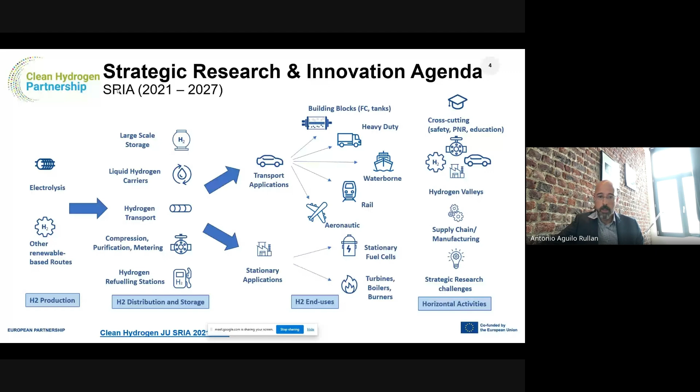So how do we work? We have the framework throughout this multi-annual financial framework, and then we have annual work programs, which are accompanied by annual calls for proposals. So we have launched now since 2022 four calls for proposals. The last one closed in April this year. We have received an unprecedented number of proposals, 212 proposals submitted to us. We will proceed with evaluations before the summertime. And then we are already working in the preparation of the next call for 2026, which is expected to be published in January 2026.

The way our work programs are drafted, as I said before, our governance is made up of the European Commission and the industry and the research communities. So basically there is a co-creation between those actors, which is then managed by the joint undertaking. We are now starting to prepare call 2026, and the process will end towards the end of this year. And as I said, the publication of the next call will be in 2026. In terms of the rules, we are bound as well by the general annexes of Horizon Europe. We have some specific conditions, but the way topics are drafted and structured is very much aligned with other topics in Horizon Europe, so there is no difference in that regard.

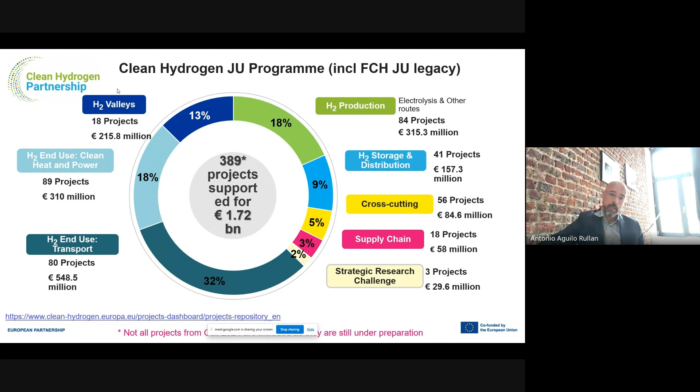And now we are covering to the same extent all the other elements of the value chain, especially on storage and distribution, which is something we didn't do so intensively in the past. So that's a bit for the projects.

And just the very last slide, I was mentioning before that as the technology matured, back in 2014, we had one of the first integrated hydrogen ecosystems. We called them hydrogen territories in time. That's the BIG HIT project. And that set the basis of what we refer to now as hydrogen valleys, which are, as I mentioned, integrated hydrogen ecosystems limited to a given geography in which we are generating green hydrogen with renewables. Then this is distributed, stored as necessary, and used by different applications.

So now we have 21 of these projects. We are supporting them with funding of around 250 million euros. And of course, in the Horizon Europe program, we have very limited funding. So on average we are funding these projects with 20% of investments. This is why it's no surprise that the total cost is around 1.3 billion euros. So basically, these projects are really a catalyzer to develop these ecosystems across Europe. And the rest is coming mainly from other sources of public funding, national, regional funding, but also from private investments.

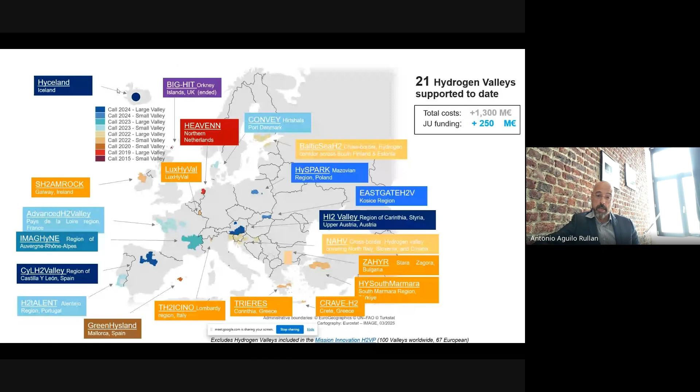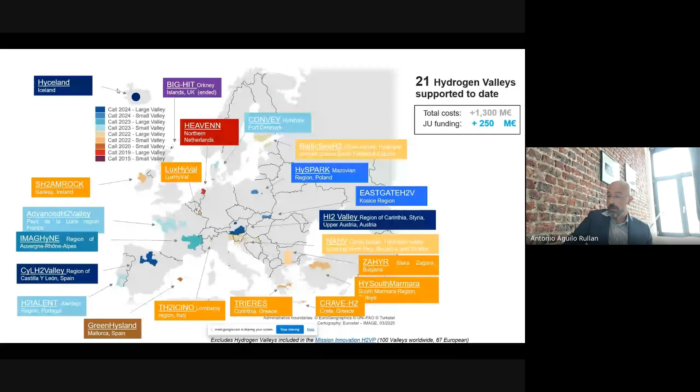We have more details on these projects on our website, but I think what is interesting to see here without going into the details is how spread the support is, covering all areas of Europe. And just to end, looking at the future, of course, we are now moving into the next framework program. There is nothing yet certain. We hope that we will continue with the joint undertaking in the next multi-financial framework, but this is, of course, something that cannot be taken for granted.

And just to add that while we are the main R&I instrument of the European Union to support hydrogen projects, hydrogen is supported also by other programs. This is something which I mentioned at the very beginning. It's reflected in the agenda today with projects from different programs. But we are, again, very happy to participate in this type of event because they probably target a different community than what we are used to. And I think at this point in time synergies among different programs, stakeholders and governance levels are important. We are very pleased to be able to let you know who we are and what we do. And if you have any questions, feel free to get in touch with us.

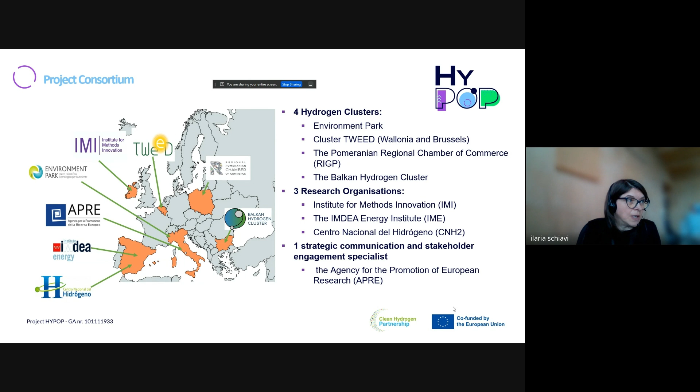A quick slide to tell you how we interpreted public awareness. We thought that it wasn't just the citizens that we had to work with, but from bitter experience, which I'm sure some of you have already had as well, we thought that we needed also to try and bust some of the myths with the public institutions, so first responders, permitting, certification bodies, and decision makers. So for this reason, the project has had two parallel areas of work, which will both result in some tools which we hope will be useful to raise the awareness both in the citizens and in the public institutions. And we have reached some interesting results so far.

So how we proceeded in this project: first of all, we wanted to analyze the status quo, so the public understanding, the institutional requirements, and we gathered data from surveys, from social media, from mass media, for the public engagement aspects, and of course on the local regulations. Then we proceeded with some co-creation workshops to try and speak directly with the citizens and the stakeholders, and it hasn't been easy, especially for the stakeholders.

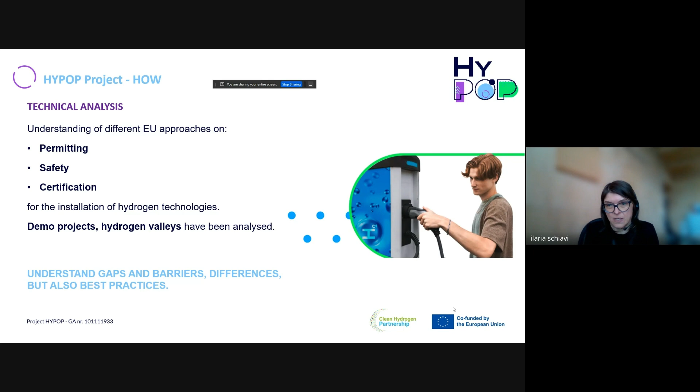As for the technical analysis, we started looking at the different approaches on safety and in general permitting and certification of hydrogen technologies. We analyzed different demonstration projects. We also analyzed the hydrogen valleys to understand how they are addressing these aspects, and we found a few differences amongst the countries. And again, this was really good to understand what the barriers are, where there are perhaps some gaps in regulations, because the regulations haven't quite caught up with what's happening, and then also the best practices from the so-called front-runner countries that are already working on this.

So, as I mentioned initially, we had the brief to cover particularly the EU 13 countries. Of course, we covered the so-called HYPOP countries because they are the ones that we know better, and we can interact directly with our public authorities in the local language, which is an important factor for the interaction with these authorities. But also we looked at the so-called front-runner countries, which are those countries where hydrogen technologies have been implemented the longest, and therefore there is more knowledge about these technologies.

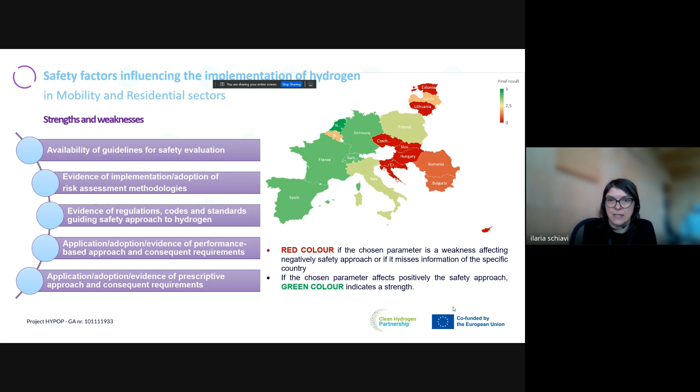The second phase of the project was about the co-creation workshops. So we went out and we spoke to both the citizens and the institutional stakeholders. And the latter weren't so easy to engage. Again, country-specific differences could be found depending on the different ways that, for example, safety or permitting is carried out.

But we did engage the citizens and the stakeholders in the local language, undertaking events, large international conferences, undertaking events specifically on these aspects, and we are now collecting all the different information from the different countries, and we will be using these for putting together the guidelines based also on the findings of the technical analysis.

So for what concerns the public engagement strategies, we will come out with a guideline, which is, again, to be used by those people who are implementing hydrogen installations and need to speak to the public, and also by the communication officers who perhaps need to speak to the public.

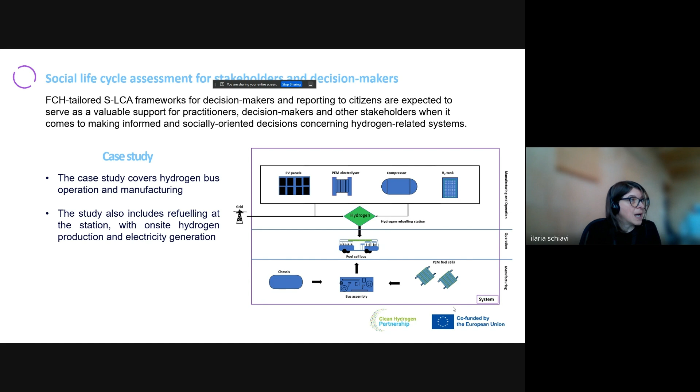Of course, social life cycle assessment is a tool that we are getting more and more used to, and it needs to grow also as a tool. But we contributed to that as well. And finally, the social life cycle indicators are one of the outcomes of the project, but as I mentioned, these are all guidelines that we will be publishing by the end of the project in September, and you will find them on our project website, really there to be used for making sure that we grow as a continent in introducing hydrogen technologies in a safe way, in respect of the permitting requirements, certification requirements, and also with a clear communication strategy with the public.

What's next? So in these last few months, we will undertake a mutual learning workshop in September to share with other projects HIPPOP achievements and transfer our knowledge and tools to the different projects. So watch out for this. And also we will finalize our HIPPOP toolkit, which, as I mentioned, wants to collect some informative material which would support the awareness raising of both public and citizens. So again, refer back to our website, and if you have as a project some interesting video material that you would like to share, please get in touch, because we would like to keep enriching this tool.

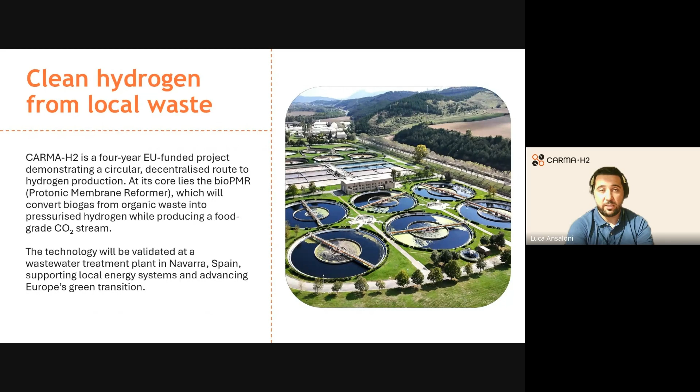And at the core of the project, there is a technology which is called protonic membrane reformer, and I will give you more information about it in the next slides, which will basically convert the biogas from organic waste into pressurized hydrogen. And also, it will be able to split hydrogen from CO2, producing also a food-grade CO2 stream. And the technology will be validated in a wastewater treatment plant in Navarra, Spain, which will help the green transition of Spain, but also of Europe in general.

A bit of information about the key figures in our consortium. So the full name of the project is called Carbon Negative Pressurized Hydrogen Production from waste using an energy efficient protonic membrane reformer. It is coordinated by AIN, which is the Association of Industry Navarra, which is a local industry association in the Navarra region.

But we are in total 12 partners from 5 different countries. You can see here, let me see if I'm able to use the pointer. Yes, we have several technology providers like CoorsTek Membrane Science that is developing the protonic membrane reformer, but also Pentair with 2 different subsections, which are technology providers.

We have end users like ERA, Shell, and SNAM. We have local communities that are those owning the plant and also operating, like Mancomunidad and NILSA. And finally, we have research institutes like CSIC in Spain and SINTEF in Norway. We have a total budget of about 10 million, which comes from the EU, let's say, which covers about 70% of the total budget required to perform the demonstration.

As I was saying, at the core of the project, there is a technology called protonic membrane reformer, or in short, bio-PMR, which has been developed by CoorsTek Membrane Science. And the very interesting aspect of this technology is its process intensification potential. Because as you see here, through this technology, we are able to combine the 6 different steps of traditional steam methane reforming, which is, I would say, the most established method to convert natural gas into hydrogen and CO2, and we can combine them in one single step.

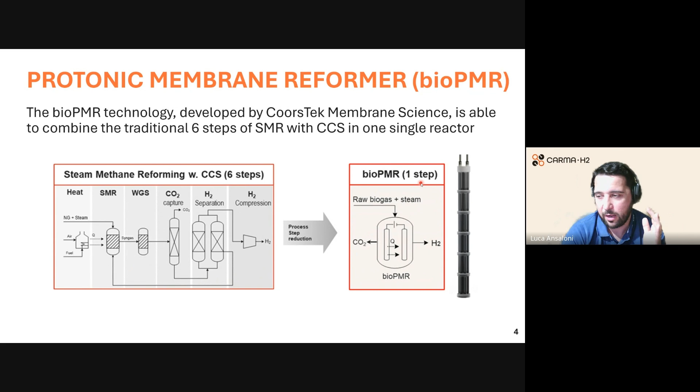And these 6 different steps are basically the heat that you need to provide to the natural gas stream to enter the steam methane reforming reactor. And then you have a water gas shift reaction that drives, let's say, the products towards hydrogen and CO2, but subsequently you also have to split CO2, separate hydrogen and purify it, and then finally compress it. All these 6 steps can actually be performed inside the bio-PMR.

The bio-PMR reactor is a membrane reactor where inside we have protonic ceramic membranes. And these are typically operated at relatively high temperature, between 400 and 800 degrees C. And under these conditions, they are able to break hydrogen into subatomic particles, which means protons and electrons, and then are able to drive, let's say, protons across a dense ceramic electrolyte. And in here, you can see actually the structure of these membranes.

So the BZCY is the ceramic electrolyte. And then the membrane is composed of 2 other layers. You have a nickel BZCY on the top and then also on the bottom. And these 2 layers are also the electrodes of the system. And at the same time, the presence of the nickel allows also for the catalytic reaction of CO2, methane, and water towards CO and hydrogen, which is then driven also with the water gas shift towards hydrogen and CO2.

So basically, as you can see from this representation here, what you do is that you send methane and water inside the inlet of the membrane, and then because of the catalytic reaction of nickel, methane starts to react and you form hydrogen and CO2. But then at the same time, by circulating electricity through the membrane, you're able to extract the protons that are then recombined in molecular hydrogen on the other side of the membrane. And what you end up with is basically compressed hydrogen, and CO2 plus water on the other side.

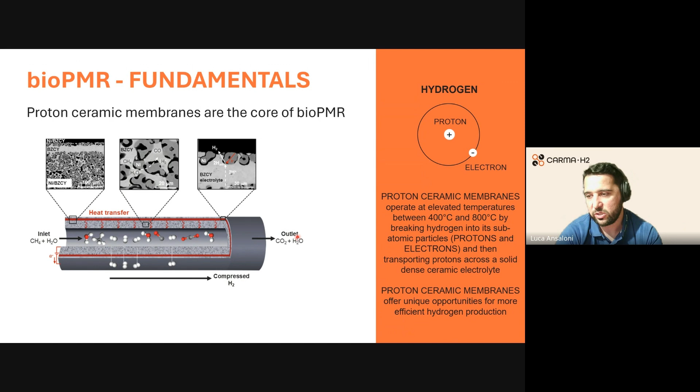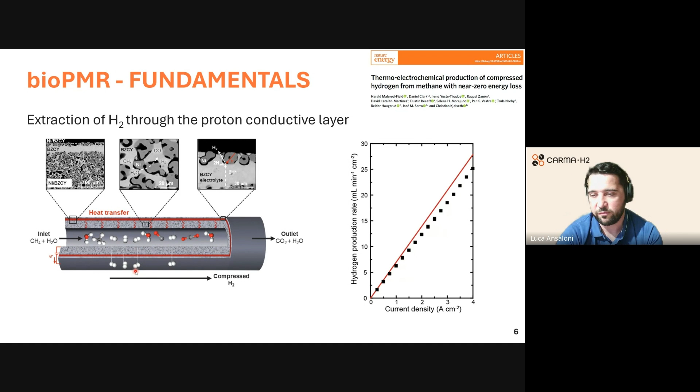And by, let's say, increasing the current density, you are able to tune the production rate of hydrogen. So you are able to tune how much hydrogen you actually pull on the other side of the membrane. And this is interesting because by doing so, you actually have the feature of a traditional membrane reactor. In particular, you are able, as you can see here, to convert methane almost entirely. We have conversion degrees up to basically 100%. And at the same time, you're also able to drive the water gas shift reaction basically towards the products, so towards CO2, suppressing almost entirely the CO yield.

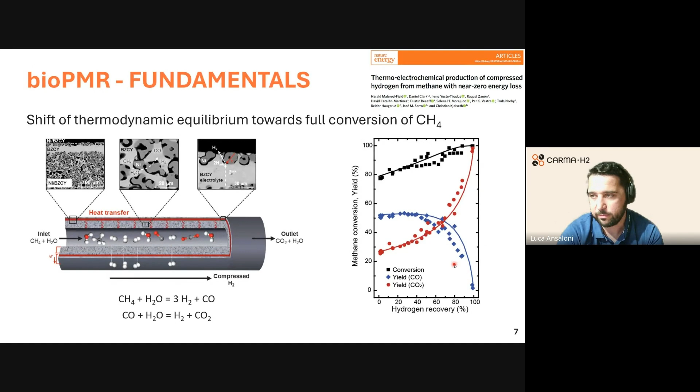At the same time, this system is also quite interesting because it is a near zero energy loss system, meaning that by combining all these 6 different steps that we talked about in the beginning in one single reactor, you're able to counterbalance the extremely endothermic steam methane reforming reaction, which is represented here, by basically providing heat through the exothermic reactions: the water gas shift, the separation, which is electrically driven, and also the compression, which is also electrically driven, and therefore generating heat at the same time.

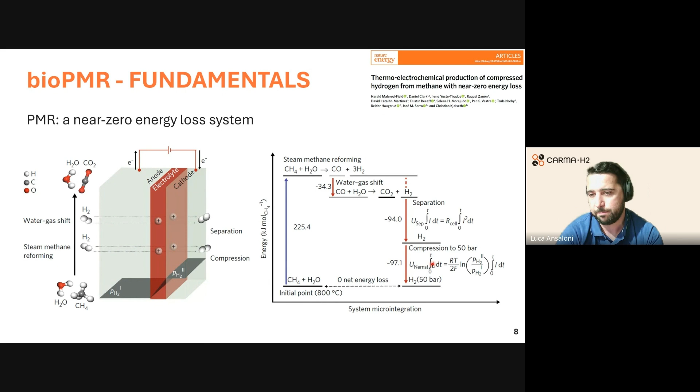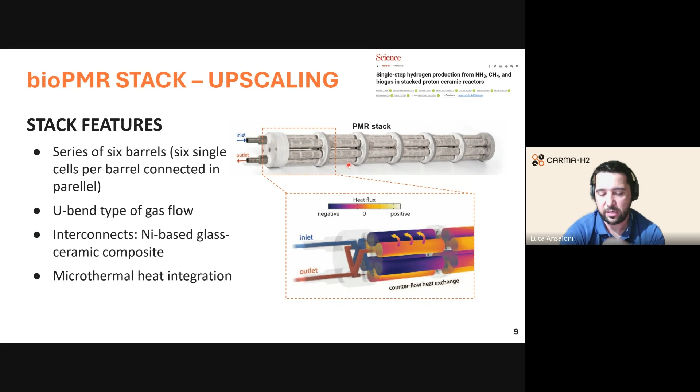Partners like membrane science try to also exploit this feature and develop a reactor which is called a U-bend type gas flow. And by doing so, they are able to basically recover, as you can see here, the heat exactly where you need it. So basically at the outlet, where you will have the highest amount of heat because of the extraction and separation of hydrogen, you put it in contact with the first part of the reactor, where the endothermic steam methane reforming reaction is happening. And through this thermal integration, you are basically able to run this system without the need of additional

And we have also demonstrated already in the lab that it's possible to use a biogas stream. For us, a biogas stream was a stream composed of CO2 and methane, meaning that in addition to the 6 steps that I showed you before, we can also avoid the CO2 removal step that you need in a biogas process to enter the traditional steam methane reforming reactor.

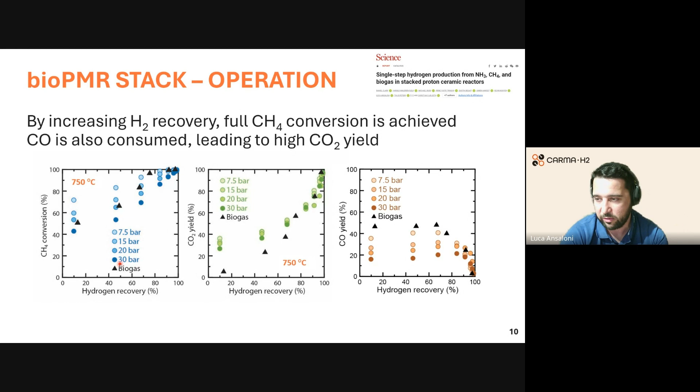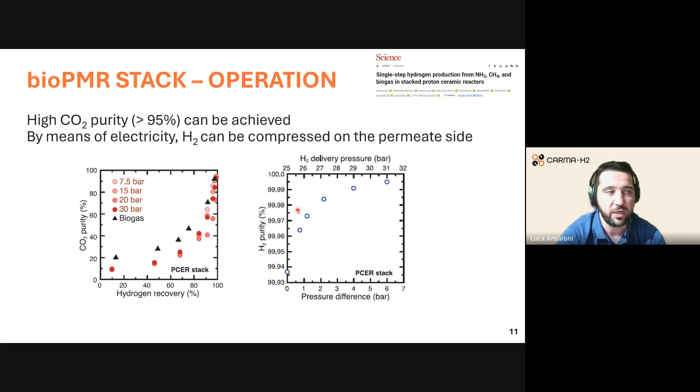We can also achieve pretty high purity on the permeate side and on the retentate side of the system, meaning that this CO2 can be already ready for liquefaction, as you will see later. And at the same time, the system, through the electrochemical compression, can also be operated so that the permeate side is at higher pressure compared to the feed side, which is a feature that is very peculiar for this type of electrochemical system and cannot be achieved with traditional membrane reactors that are based on physical separation.

And then finally, to conclude a little bit about the demonstration test that we will have in Spain. In particular, the BioPMR technology will be demonstrated at the Arazuri wastewater treatment plant in Navarra, as I said in the beginning. The plan is to run the BioPMR unit for at least 4,000 hours, producing about 500 kilos of hydrogen per day, that will then be used for energy and mobility applications. At the same time, we will also generate about 4 tons of food-grade CO2 daily that will be ready for use. So we plan on utilizing this CO2 for CCUS applications.

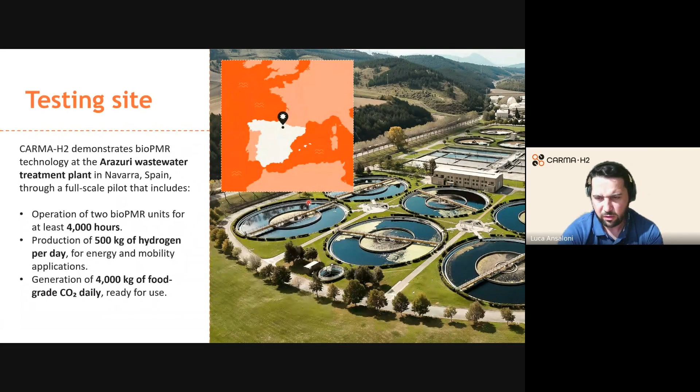And this is just a very simple scheme of how the system will be operated at the plant. We will take the biogas coming from the anaerobic digester, and then we will have first biogas pretreatment. In this case, it's mainly going to be about desulfurization, because we have to understand what type of sulfur content is allowed inside the BioPMR unit that is coming downstream. And then finally, the BioPMR will produce the pressurized hydrogen, while the CO2 stream will be sent to a liquefaction unit that will make liquefied CO2 that can then be taken to utilization applications afterwards.

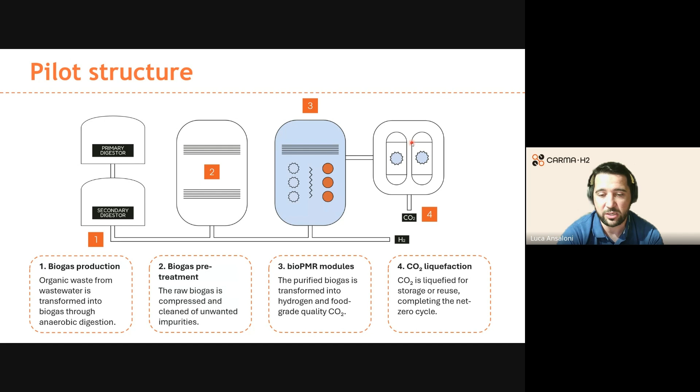Thank you very much, Luca. Next up, we have Hugo from the University of Évora, presenting the H2 Talent Project, developing hydrogen valleys in Portugal.

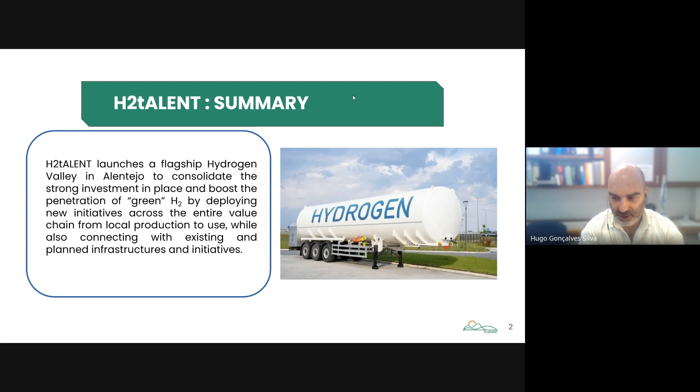So our project is a hydrogen valley. For that reason, it's at a higher TRL, so we are not presenting research in that sense, and in that way it's slightly different from the last presentation. Basically, the idea of H2 Talent is to launch a flagship hydrogen valley in Alentejo, and to consolidate the investments that are already in place in green hydrogen. And we want to develop new initiatives across the entire value chain, meaning that we are going to address production to end users.

Our objective is to produce more than 500 tons per year of green hydrogen, and it will be used by several off-takers in industry, mobility, and building applications. Furthermore, we want to explore the strategic position of Sines Port.

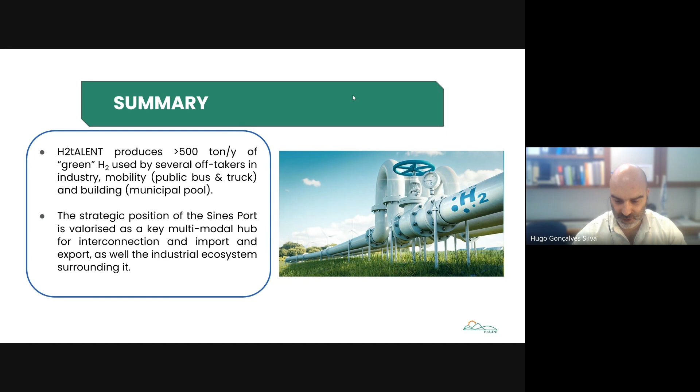It's a port in the south of Portugal that is meant to be valorized as a key multi-modal hub for interconnection and import and export of green hydrogen. So it is being prepared for that possibility.

The project, let me just briefly mention, is composed of 7 work packages, and the fundamental work package in which most of the action will take place is work package 3, industrial application at the Sines backbone, and work package 4, applications in industry, mobility, and buildings across Alentejo.

Right now, we are in the development phase, so I don't have results to present, but I can talk a bit about our demonstrators. So basically, the valley is composed of 4 demonstrators. The most important one is at Sines. It's basically an electrolyzer, small scale, but this is the first phase, 15 megawatts. The complete phase will reach 120 megawatts, but the first phase is meant to be a demonstration phase, and it will produce roughly 500.

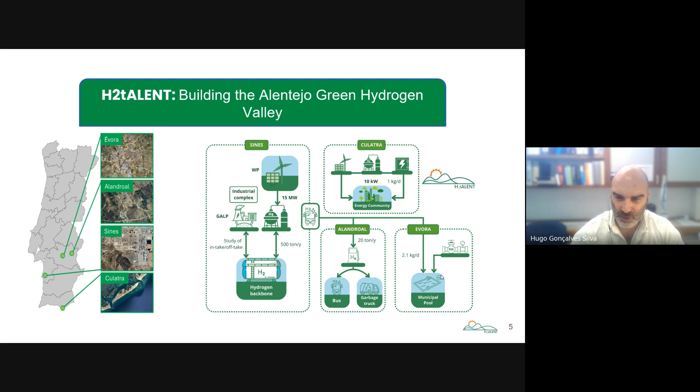In terms of the time frame, it's a 5-year project. We are already in month 15, and we are now in the development phase of the demonstrators, and hopefully in a year's time we will be starting demonstration. So our goal is to have the demonstrator running in 2027.

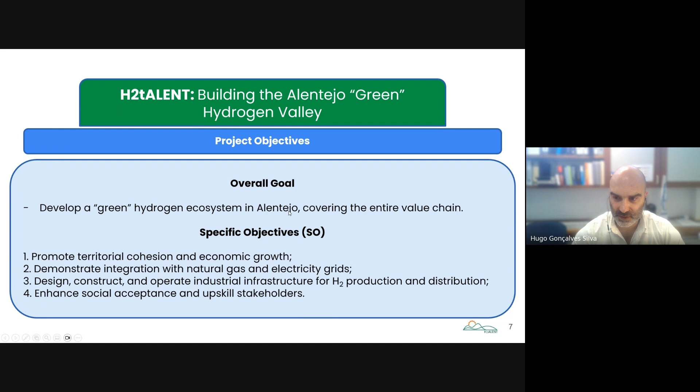Let me just briefly mention that our specific objectives are to promote territorial cohesion and economic growth, demonstrate integration with natural gas and electricity grids, design, construct, and operate industrial infrastructure for H2 production, and enhance social acceptance and upskill stakeholders. These specific goals are under the umbrella of the overall goal, that is the development of the green hydrogen ecosystem in Alentejo, and we are covering the complete value chain.

Furthermore, we should highlight that we also use digital tools and environmental impact assessments. Another very important aspect of this project is that we are promoting replication in 2 other hydrogen valleys, in Germany and the UK. So the idea is that lessons learned from this project might be helpful to follow-up valleys. We are publishing our deliverables in the Zenodo community of H2tALENT, so everyone is free to go and check the information that we are producing.

So basically, as we have introduced, we will be producing 500 tons per year. We are expecting to export green hydrogen from the port of Sines. Import and export is a very important topic, because there are very ambitious targets for hydrogen in Europe, and we should consider in such ambitious plans the necessity to import hydrogen from other countries. In this project, we are considering the Brazil, South America, Latin America market, and the North of Africa market.

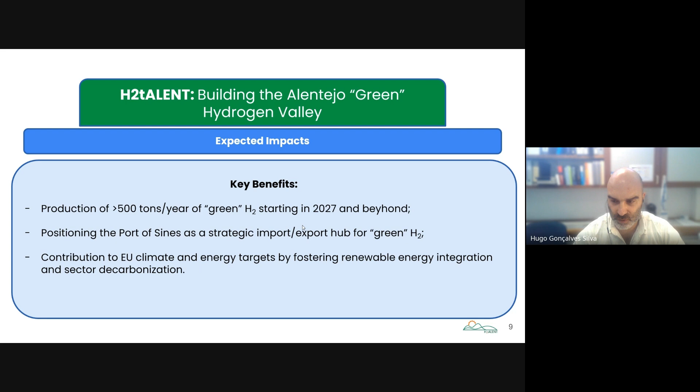So we also contribute to the European Union climate and energy targets by fostering renewable energy integration and sector decarbonization. Our consortium is composed of 29 partners from 7 countries, and we include universities, technology companies, and public stakeholders. We have a strong collaboration with international initiatives, as I have already mentioned, especially Brazil and Morocco.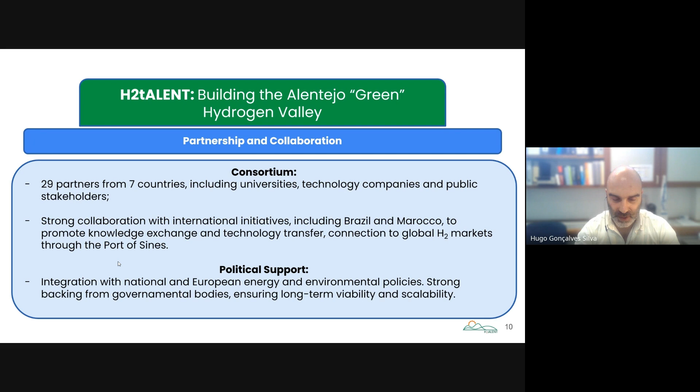In terms of the political support, we have moved towards the political support. So an ambitious project like this has to have public support, and so we are basically in two aspects. We have integrated into the consortium public institutions that are related with key policies, and we are also in contact with the Portuguese government in order to have support on some of the aspects that we want to implement. Please take note that we are sometimes a bit ahead of the legislation that is being rolled out in hydrogen, and so this political support is fundamental.

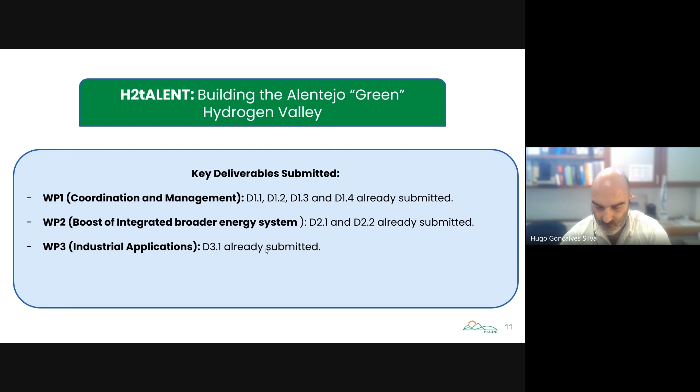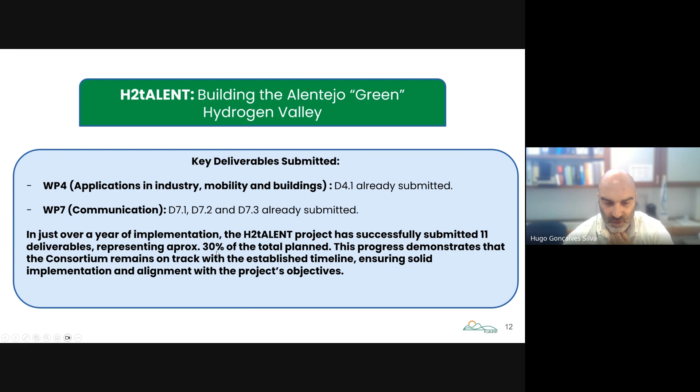Now very briefly, in terms of achievements, we have already submitted many deliverables. As I said, they are published in Zenodo, so if you are willing to know more about H2tALENT, you can go there. And we have submitted approximately 30% of the total planned deliverables. We have reached milestone 1, and in terms of achievements, we also managed to put together a team of 29 partners working together from 7 different countries, which is a very challenging task.

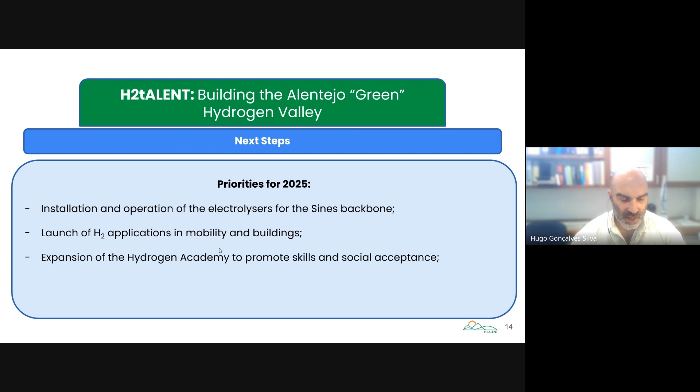Finally, our next steps are the installation and operation of the electrolyzers at the Sines backbone, launching H2 applications in mobility and buildings, and expansion of the Hydrogen Academy to promote skills and social acceptance. So our priority is to implement H2tALENT naturally, and also we want to submit new projects in this field to consolidate the ecosystem that is being created.

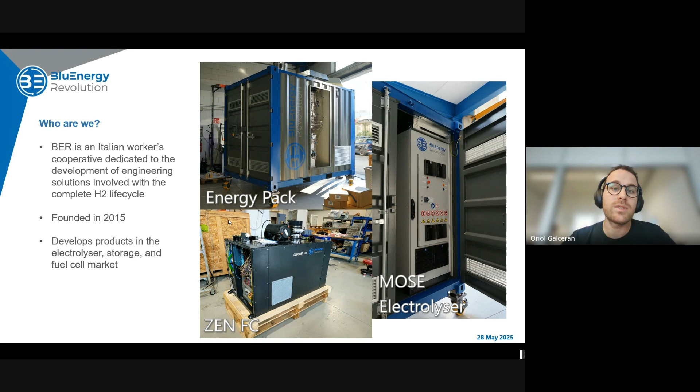So, going specifically into the EVELIXIA project, it's a big project. There's a lot of partners, I think it's about 26 of them, and it's a very broad project. The main objective of it is developing a framework by which smart buildings can communicate with each other and the grid. So more specifically or technically, we're trying to build an API that allows bidirectional communication between the consumers of electricity and the producers in a standard manner, in a way that can facilitate things such as grid planning, monitoring, etc.

There's also a big part of public engagement. So many of our pilot sites deal directly with the population, informing them about energy consumption behaviors, and just trying to bridge the gap between the grid and the consumer. So the project has 7 pilot sites in France, Denmark, Finland, Romania, Spain, Austria, and Greece. And all of them have slightly different approaches towards testing this platform that I was talking about.

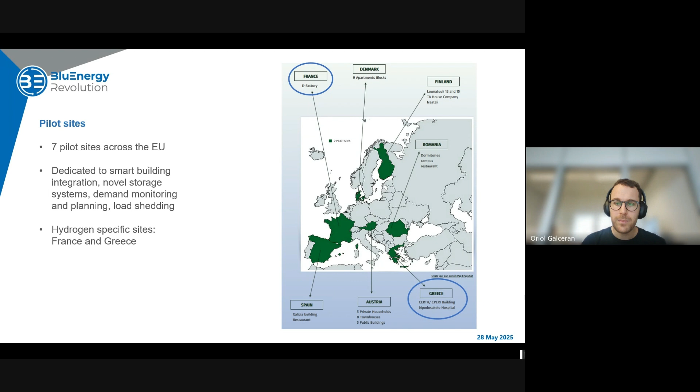So what we're doing in Greece is we are installing our energy pack system. Our system is basically a self-contained energy storage system which uses exclusively hydrogen as an energy vector. This prototype for the pilot site has 3 kilos of metal hydride storage and 10 kilowatts of fuel cell. But we've developed this system, and I think this speaks about the capacity that these projects have to provide innovation in the private sector.

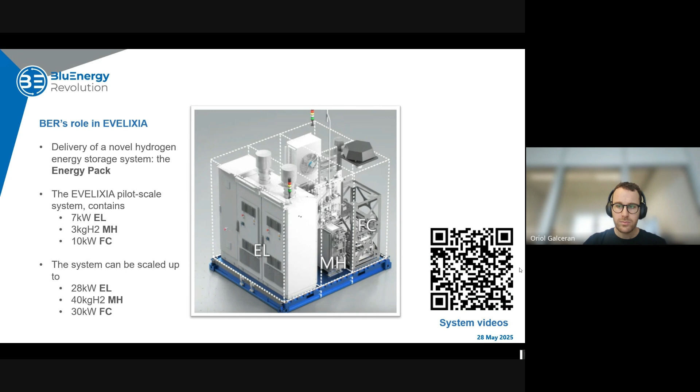Using the development that we've gone ahead with for this system, we've made it so the energy pack can be scaled up into a much more powerful system. So we can go up to 28 kilowatts of electrolyzer, 40 kilograms of hydrogen storage, and 30 kilowatts of fuel cell within the same system. So I think that speaks a lot about the usefulness of these funds. There's a QR code. You can see some videos that talk a bit more in detail about how the system works. It's also in the next slide.

So the system is going to be installed in the CERTH Research Center in Ptolemaida in Macedonia. Not North Macedonia, Macedonia, the Greek province. The building currently has 20 kilowatts of photovoltaics and a battery system. And what we're going to do there is directly connect the energy pack to the existing system. So in the scenario, for example, that the photovoltaic is higher than the load and the batteries are full, that energy would otherwise be given back to the grid.

What we're going to do in this case is turn on the electrolyzer, absorb the excess energy, store it in the metal hydrides, and then when it's needed back, so when the load is higher than the photovoltaic and the batteries are empty, we're going to reconvert that hydrogen into electricity via the fuel cell.

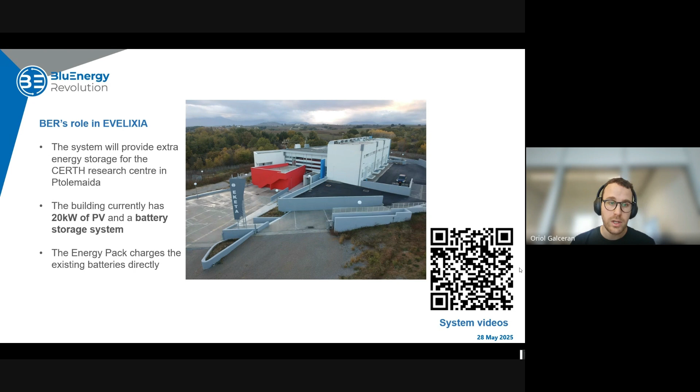So in terms of dissemination activities for this project, we've brought the energy pack to 2 fairs, the Hannover Messe in Germany, and just last week, the Piacenza Hydrogen Expo. We found a lot of interest, because we've been a company since 2015, and we've worked exclusively in the hydrogen market, but we always provided things where the user had to interact directly with hydrogen.

This is the first time that we provide a product where the hydrogen is completely contained within the product and the user doesn't have to interact with the hydrogen. Sometimes they're a bit scared to deal with it because it's not known how to deal with it on a larger scale. So we found a lot of interest for this since the user has to deal with electricity only, which is much more common knowledge. So we're very happy with the development that has been facilitated by this project and the interest of the public in it.

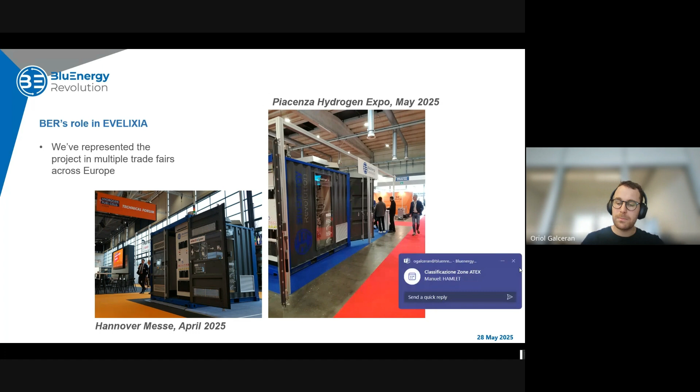So the next steps for the project are, as you can see here, the delivery of the system. The system is currently on its way to Greece. It's on the truck and it's going there. And late June, we are probably going to travel there to get the commissioning up and running. We are the first pilot site to be doing the commissioning, so we're very happy about that.

And the platform that I talked about will start to be tested at the end of this year and next year. And the final objective is that our energy pack will be completely controlled by the system and respond to the demands of the building, but also of the grid.

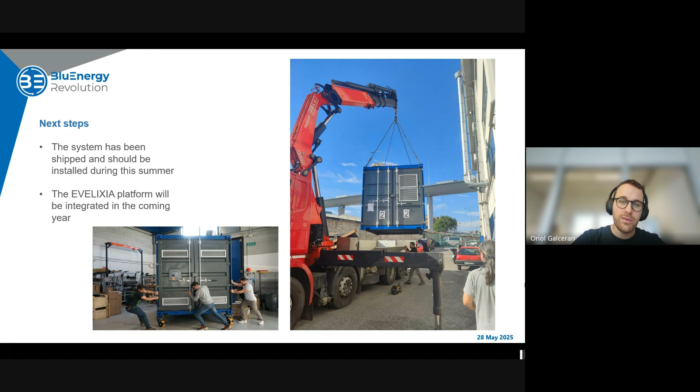Thank you, Oriol. I'm sitting here giggling because that picture of the 3 men pushing the electrolyzer is very funny. Yeah, I wanted to show off our strong guys in the workshop. All right. Thank you very much, Oriol.

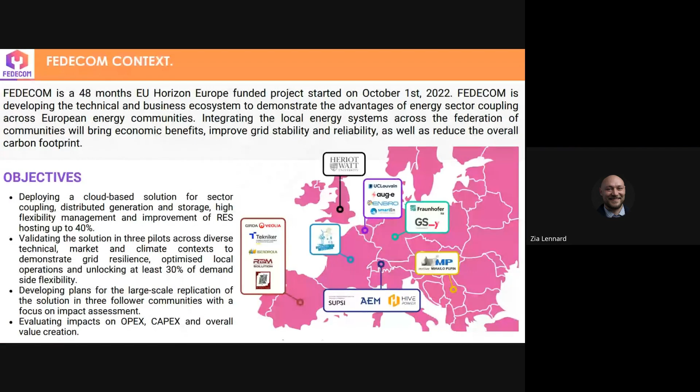across European communities. Sorry, Carlos, we're still on your title slide. Sorry? We're still on your title slide. Yes, I move. I don't know why. Okay, now it's moving? It's not. I'll try to share again. Okay. Sorry. I'll try to do that again. Now? Now we see your title slide. Now you see the second one? Yes, now it's good. Perfect. Finally. Thank you so much, Zia.

As I was mentioning, FEDECOM is a 48-month European Union Horizon Europe funded project, and we started in October 2022. In FEDECOM we are 17 partners from 7 different European countries, and the main objectives are developing a cloud-based solution for sector coupling, distributed generation and storage with high flexibility and improvement of the renewables.

The second one is validating the solution in 3 pilots. I will explain a little more about the 3 pilots, and at the end I will focus more on the hydrogen pilots, in order to check the diverse technical, market and climate contexts. The next objective is developing plans for the large-scale replication of the solution in the follower communities. The last one is evaluating impacts on OPEX, CAPEX, and overall value creation.

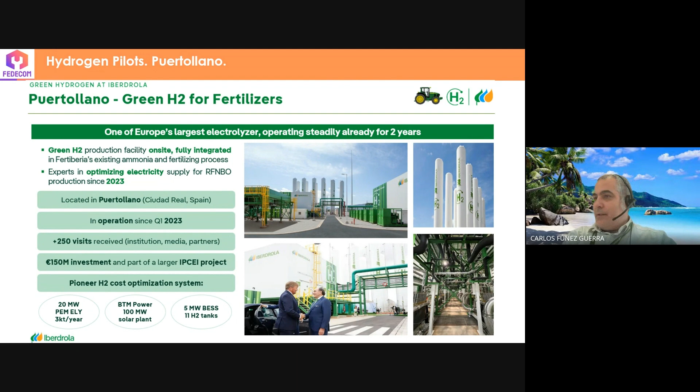Going a little deeper into this project, you can see here more details of the facility. This is the electrolyzer building. We have 20 megawatts, with 16 stacks of 1.25 megawatts each, but with a common balance of stack and a common balance of plant. You can also see the letter E. This is a skid. This is the rectifier and transformer to supply electricity to the stacks.

We have hydrogen vessels and a compression system, because we produce hydrogen at 30 bar, 360 kilos per hour, and we have the possibility to increase the pressure up to 60 bar, store it in the vessels, and supply also during the night if needed. For the cooling system, we are using air cooling. At the end of the day, this is a complete facility with a lot of options to be flexible.

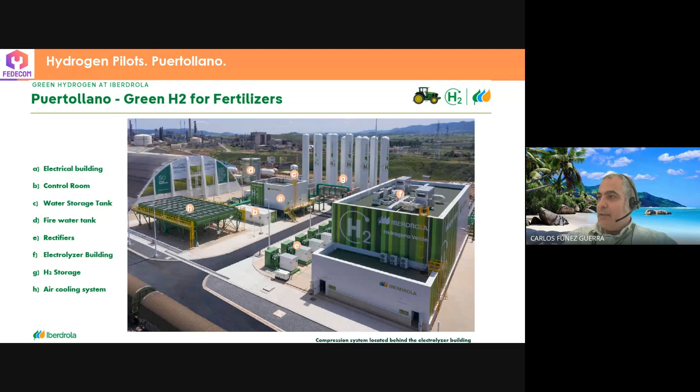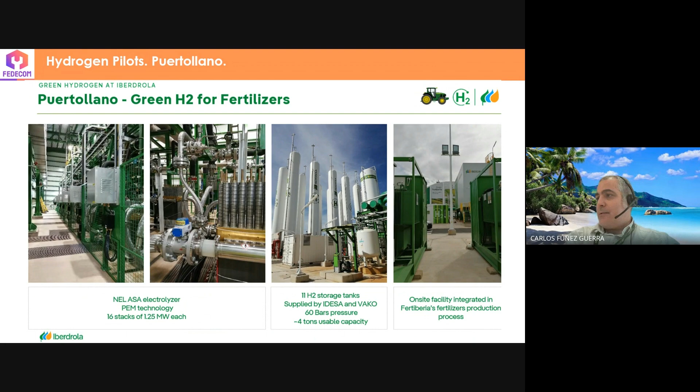We are connected directly to a PV facility through an underground electrical line of around 10 kilometers. In this PV facility we also have batteries, 5 megawatts of power and 20 megawatt-hours of capacity. With all of these options, we have a lot of possibilities to work with this project. Here's a picture of the electrolyzers, 16 stacks of 1.25 megawatts each, the vessels, the rectifiers, transformers. And here you can see some details about the PV.

As I mentioned before, we have a direct connection with the PV. The facility is 100 megawatt. We are taking part of it, so the electricity is going to the grid. And also we have the batteries, as I mentioned to you before. This is the first pilot that is included in the FEDECOM project.

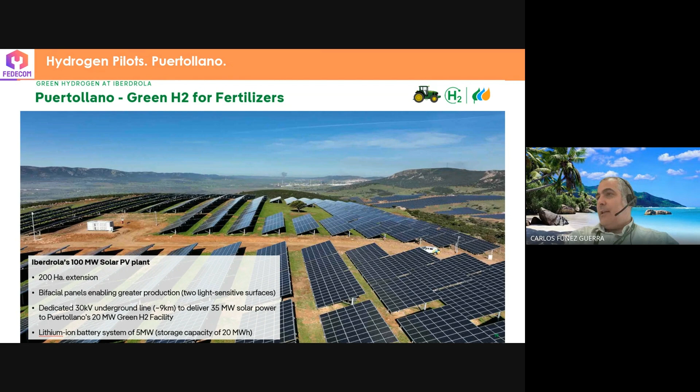And we have the second one, that is a hydrogen refueling station. This hydrogen refueling station is located in Barcelona, and we are supplying hydrogen to Barcelona buses for the TMB, Transports Metropolitans de Barcelona. The TMB bought some buses, and now they are increasing the numbers. After that, they published an open tender, and we applied, and we won, and we built this filling station.

We have now 2.5 megawatt electrolyzers. We are producing hydrogen at 30 bar. We have some hydrogen storage system at 30, 350 and 450 bars, different level pressure, and we have some compression system, and also some chillers and some dispensers in order to put the hydrogen into the buses.

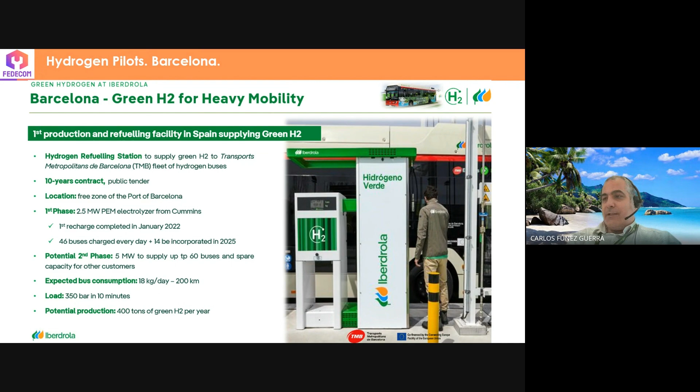And now we are filling close to 60 buses, and for the moment we don't need to increase the capability of the electrolyzer, but maybe in the next, if the number of buses continues growing, maybe we will need to scale up the facility. And here you can see also some pictures of the facility. As you can see, we have a lot of empty spaces in order to make the expansion. Now we are making expansion for some vessels, some compression system, and some dispensers.

Yes, and this filling station is also involved in this FEDECOM project, and we are doing similar works like in the Puertollano project. We are using optimization tools in order to optimize the energy consumption, and also to optimize the price of the energy. And this is maybe the most interesting thing that we are doing in this project regarding hydrogen, and also the connection of these hydrogen pilots with other pilots that are involved within the FEDECOM project.

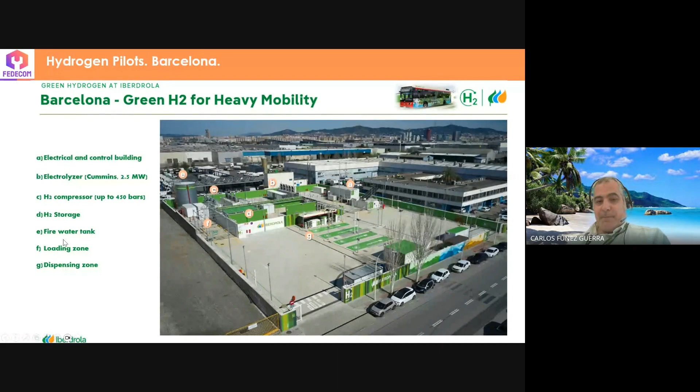Next up, we have Jose Luis from the AndreaH project presenting research on ammonia cracking for hydrogen applications.

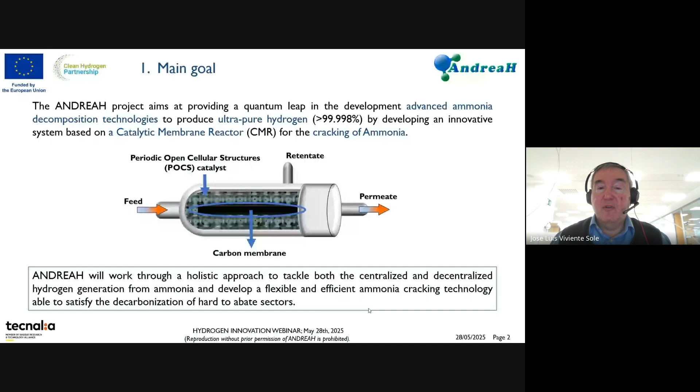In this case, the process is addressing the cracking of ammonia by using a catalytic membrane reactor, and also developing new catalysts, and also having periodic open cellular structures for improving the heat and mass transfer in the reaction zone. So basically, the idea is to develop and demonstrate a 10 kilograms hydrogen per day scale prototype, developing also new catalysts with low or without ruthenium content. We have worked in both lines.

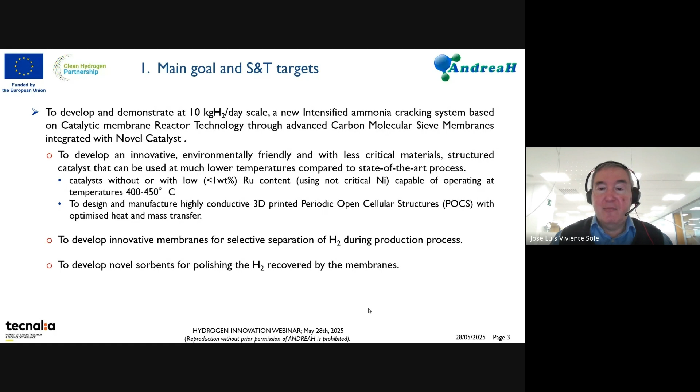Also developing this catalyst over the 3D printed periodic open cellular structures, and also to include novel membranes that are carbon molecular sieve membranes for selective separation of hydrogen during the production process. And we have a final stage that is some polishing of the hydrogen, removing the traces of ammonia, because if you want to use it for proton exchange membranes, hydrogen should have ammonia lower than 0.1 ppm. For other applications it could be higher, but for fuel cells and PEMs, it should be below 0.1 ppm.

So besides this, we will also do life cycle analysis and cost analysis and health safety analysis in the project. And we elaborate some business cases on this prototype, and also the promotion of the AndreaH results and its impact.

We are 9 partners from 4 countries, and 66% of the partnership is from small-scale industry. We cover all the value chain, from companies specialized in materials development like Umicore, energy multinational companies like Iberdrola, and also an energy storage provider, VTTI, which has bunkers in the Rotterdam port. We will test the prototype there, by the way.

And we also have research organizations and universities like Eindhoven University of Technology, Consiglio Nazionale delle Ricerche in Italy, and Tecnalia, where I'm coming from. And RINA is the entity working in life cycle analysis, life cycle cost, and health and safety analysis. So basically, we have 3 main steps in the project.

In the first part, we are developing the building blocks, we can call them like this: the membranes, the catalysts, the periodic open cell structures, and sorbents for the final polishing step. Umicore and CNR are involved in the catalyst development, catalysts supported on POCs and open POCs or foams. Tecnalia develops carbon membranes with Eindhoven, and Eindhoven is also involved in the sorbents.

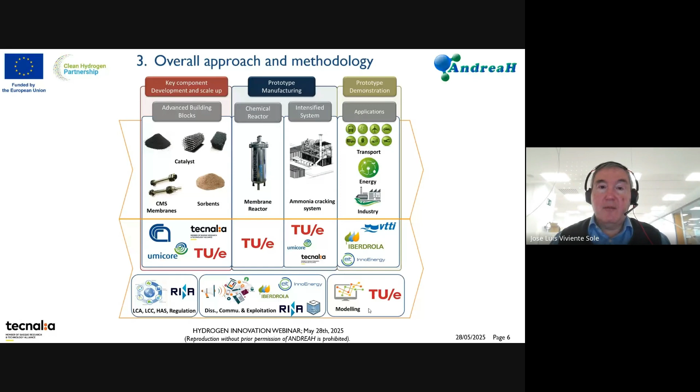Basically, we will have 5 main exploitable results that cover from the reactor to the catalyst. We have 2 families of catalysts being studied. Then we have the carbon membranes, the first time they are developed for selective separation of hydrogen from ammonia and nitrogen, and also the novel sorbents for polishing of hydrogen on the permeate side of the membranes. But overall, the key exploitable result is the advanced ammonia cracking system.

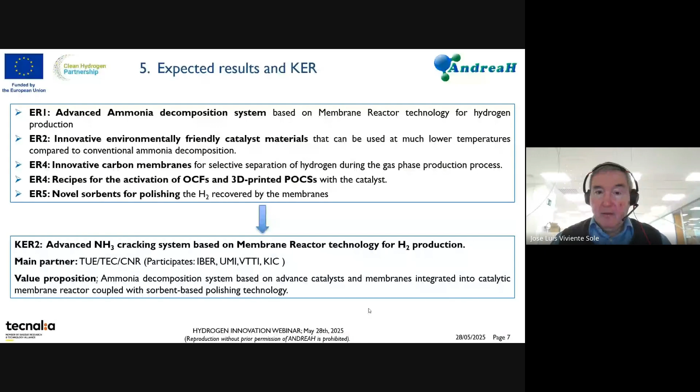With this, we want to contribute to different transversal targets: to keep technology leadership in Europe, developing innovative reactors and catalysts for ammonia cracking, and also reduce the use of critical raw materials in ammonia cracking. We're going to study and improve the economics of the ammonia dehydrogenation process, and develop business models considering the transport of ammonia from corridors outside Europe to Europe, and later having a centralized or decentralized cracking system.

So the idea is to contribute to securing the energy supply to Europe instead of using fossil fuels, using ammonia as a hydrogen carrier, an energy carrier we would say, and also to support the decarbonization of society, because there are sectors where it's difficult to abate CO2 emissions, and the idea is to facilitate hydrogen introduction in these sectors, and ammonia can contribute to this.

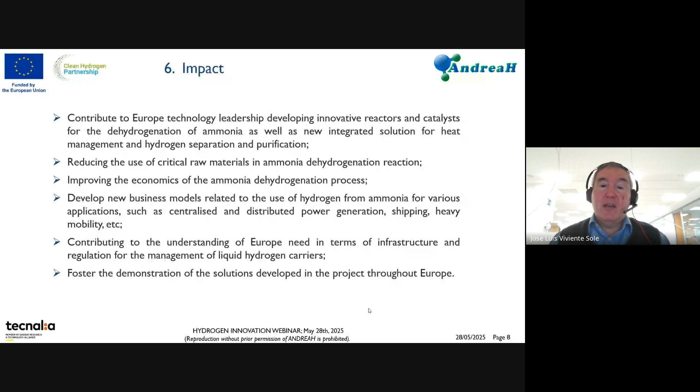And regarding the joint undertaking, there were some targets in the frame of the call to develop a range of hydrogen carriers that can be used commercially for transporting and storing hydrogen. It's easier to transport hydrogen in ammonia. We have known how to transport ammonia for maybe more than 70 years, because it's used in the fertilizer industry. Cryogenic hydrogen transport and storage is more expensive than ammonia storage.

Ammonia is already liquefied at around 1 atmosphere at around -33 degrees, far from the cryogenic temperature you need for hydrogen, or at 8 bars you can have it at room temperature. So we are also going to simulate the well-to-tank techno-economic analysis for delivering hydrogen as ammonia over a 3,000 kilometer ship transfer, like going from Morocco to Rotterdam. I've already seen initiatives for this.

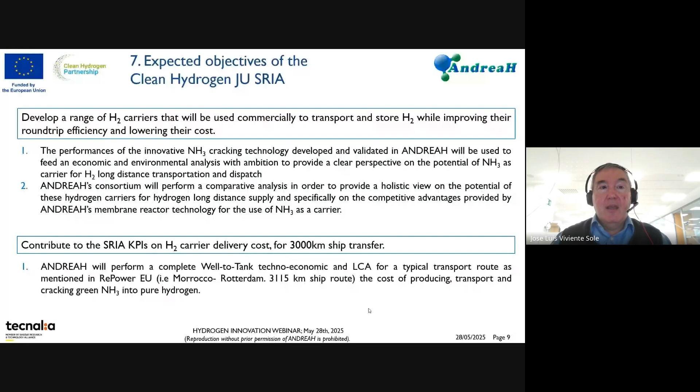And finally, we are also going to study how to reduce the energy consumption for production of hydrogen and transport to the end user. So we will focus on these activities. Here we can have conversion at around 425 degrees. You already have 100% ammonia conversion and high recovery of hydrogen. That means you work at lower temperatures than the, between brackets, standard cracking system.

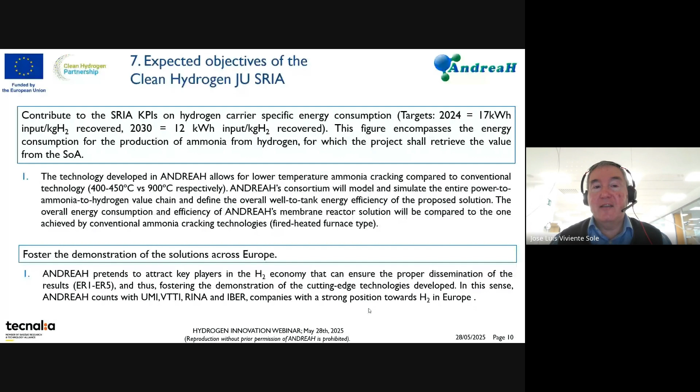So that is an overview of the AndreaH project.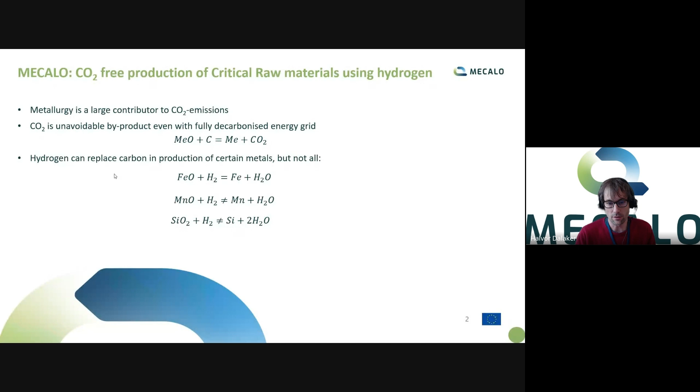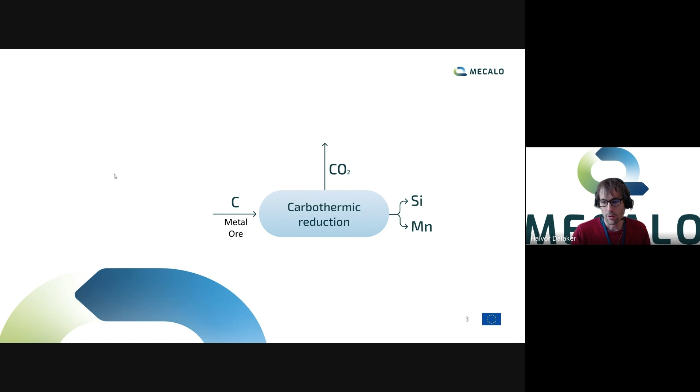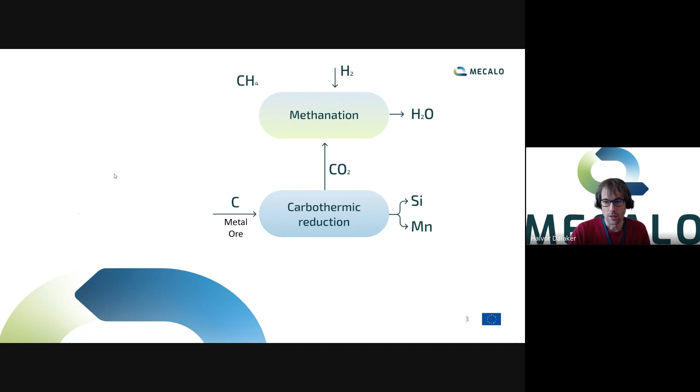So in the MECALO concept, we want to actually keep using carbon for the metal producing reactions. So we will have carbon reacting with our metal ore, creating the metals and the CO₂, but then instead of releasing the CO₂, we will react it with hydrogen in a methanation process over a catalyst. This will give us H2O as a byproduct, and we will produce methane.

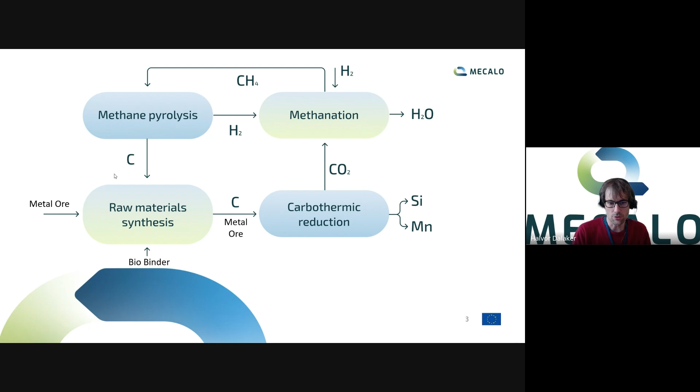The methane we can then decompose in a pyrolytic process into solid carbon. We will also get hydrogen, which we can take back into the methanation step, and then the carbon that we produce can be synthesized into a raw material that is fit for metal production. So if you look at this, the carbon is kept within the loop of the system. It never leaves. So that's why we have the name metal production with carbon looping, or MECALO.

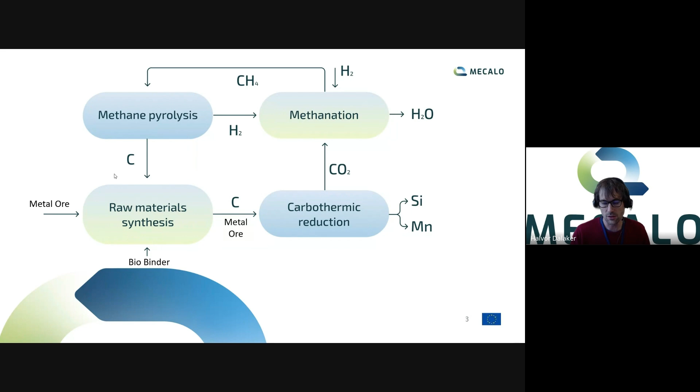And if you zoom out and look at what's coming in and out of this loop, we have metal ore going in, and we have hydrogen going in, and we have water and our metals coming out. So if you zoom out, we have managed, indirectly at least, to replace carbon with hydrogen, even in the production of these more challenging metals. But of course, it's not as easy as all this.

The main ambition of MECALO is to demonstrate its innovative concept of renewable hydrogen and carbon looping for CO₂ neutral production of silicon and manganese. And to do that, we have to overcome a few challenges that we are working on. The project has been going for about 6 months now, so I will mainly be talking about what we will do. The first challenge is to optimize the gas conversion, that is the conversion of the CO₂ into solid carbon.

And that means that we have to optimize together the methanation and the plasmolysis steps, because neither of these two reactions will be complete. So from the methanation step, there will still be CO₂ and hydrogen in the gas stream going into the plasma reactor. The methane is decomposed in the plasma reactor, which is why we call it plasmolysis. And likewise, not all the methane will decompose. So the complete optimization of these two in order to convert CO₂ into solid carbon will be very important.

And then when we have our carbon, unfortunately, the carbon coming out is a very, very fine powder, and it's completely unfit for metal production. If you put a powder into a smelter, it will just blow out with the off gas. It will never do anything. So we have to make agglomerates, and in order to get the carbon to stick together, we need some binders.

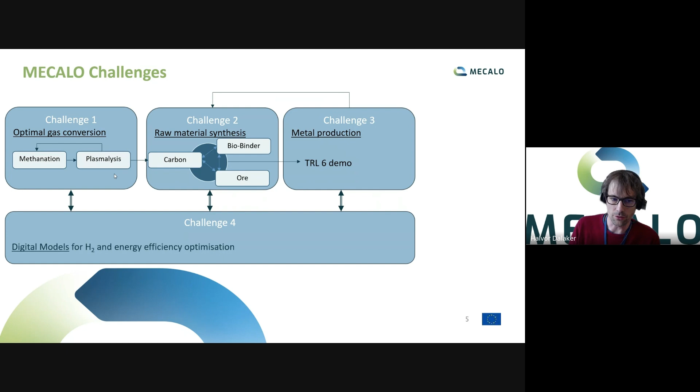Another challenge is that if you just do these things step by step, it will be very, very hard to get good numbers for hydrogen efficiency and energy efficiency. So we need to optimize the whole process, and in order to do that, we also are creating digital models of the whole process. And finally, we need to evaluate the sustainability of our concept, both in terms of economics, so technical economic assessment will be performed, also environmental assessment and life cycle assessment, and we will also look into how to best integrate the MECALO concept into different hydrogen value chains.

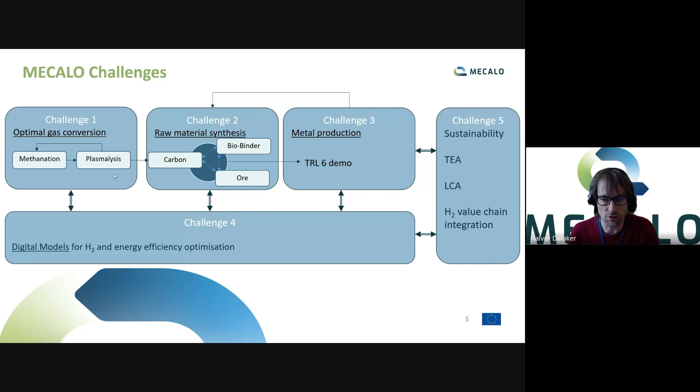These are our partners. The project is coordinated by SINTEF in Trondheim. The methanation part of the gas conversion step is done catalytically by Johnson Matthey, and then also together with the catalysis group at SINTEF, and then the pyrolysis of methane is done by Sakowin in France. They have a plasma process for this.

The raw material synthesis, we use biobinders that are developed by BTG in the Netherlands. The agglomerates themselves are made by ITPE in Poland and Glatt in Germany in close collaboration with the metal producers Elkem and Eramet. These are the big industrial partners that actually make metal today, and also together with SINTEF. Most of the modeling and simulations are done by PDC, Process Design Center in the Netherlands, supported by SINTEF, and the metal production is handled by the industrial metal producers Elkem and Eramet, together with SINTEF.

The techno-economic assessment, PDC will be doing that based on their process models. SINTEF will look at hydrogen integration, and then we have the Luxembourg Institute of Science and Technology, who will do the LCA and environmental assessment. And then always when you're working with hydrogen, you have to look into safety. In addition, we have all of these powders that are new materials and that can have all kinds of different safety issues. So we have a task on safety, which is carried out by Ineris from France. And then finally, our dissemination and communication partner is ETA Florence from Italy.

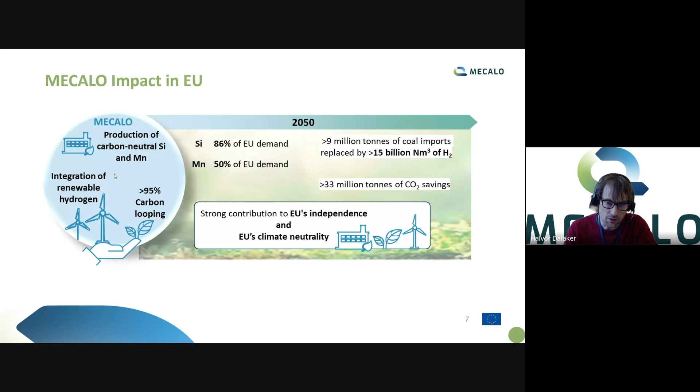So we've heard from 6 technical hydrogen projects and 1 more awareness-raising project. There's a bit of a push and pull, and I've heard several times about the policy legislation lagging behind the innovation. So how do you deal with the push and pull in terms of making sure your innovation stays aligned with policy or market trends, but also, on the other hand, what recommendations can you provide to these policymakers in order to stay up to date with the innovations that you're developing?

Anyone? It's too difficult. Okay.

So I thought I might wait, because a lot of the other people are more on the hydrogen industry. I'm more on the hydrogen use industry. But for us, one of the most important policies, I believe, will be the carbon border tax. Because we can implement all of this in Europe, but it will be more expensive than carrying on as we do today. No matter how cheap you make the hydrogen, it will be more expensive. So for us, having some kind of mechanism that prevents carbon leakage through imports will be, I think, the most critical. And then, of course, we need to buy the hydrogen.